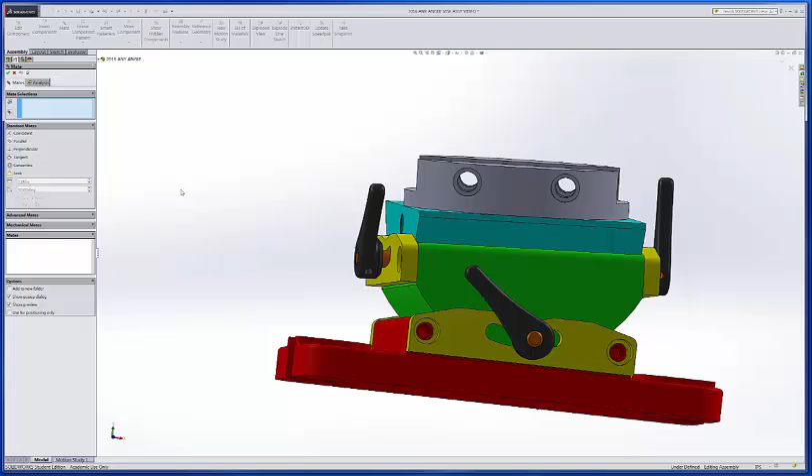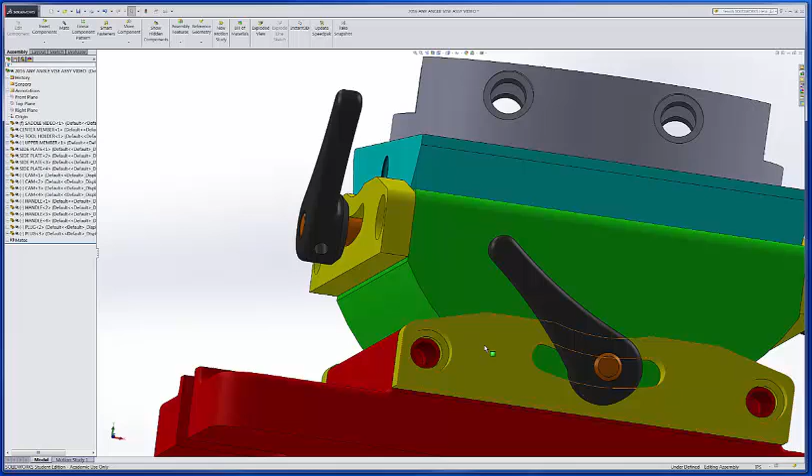So the first thing I would suggest is that we'll use a mate to line this thing up where it's flush, if you will, or 90 degrees. We want to take these two, and we're going to just temporarily get those where they line up, so that if we look at this face and we're looking straight in there, we can see that this edge right here along this green is lined up with this piece right here.

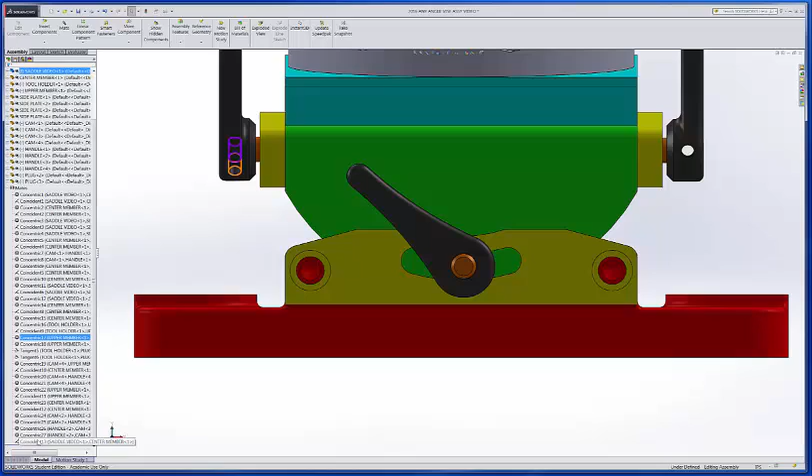So we don't want to keep that, so we'll go to the mates here, and we'll go to the last one, which is this coincident right here, and you can see that highlight, and we'll delete that. So we'll say yes. If we don't delete that, we can't get the movement that we want.

So now what we'll do is we'll put in another mate. Now up till now, all the mates we've been dealing with are standard mates, but now what we're going to do is we're going to use an advanced mate here, and we'll do a limit. So we're going to limit the angular movement.

So we're going to pick this face, and we'll pick this face. Let me back up on that. I think we're going to have to. Yeah, I think I picked the wrong one. Maybe. Let's see. There's 0. No, I guess we'll be okay.

So we want to go as much as 16 degrees. Okay, on 1. That's the maximum, and the minimum, it's going to be minus 16 degrees. Okay, and we'll accept that, and we'll see what we get.

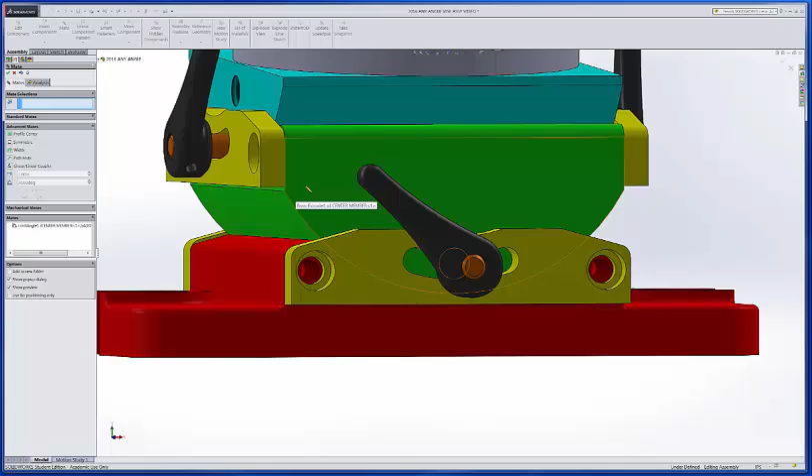So if we move that now, notice it limits how much we move. The only problem is I want to make sure that if we go in there and look at this face again, oops, sorry, I need to get out of that command. Go and look at that face. Normal to that. Yep, we're not hitting.

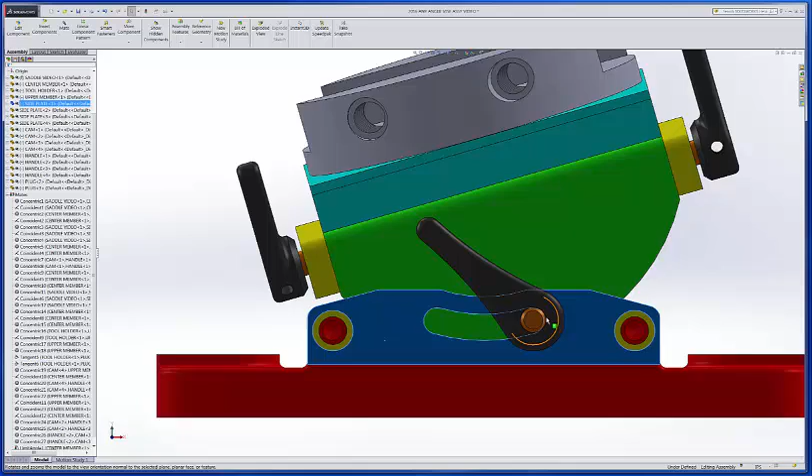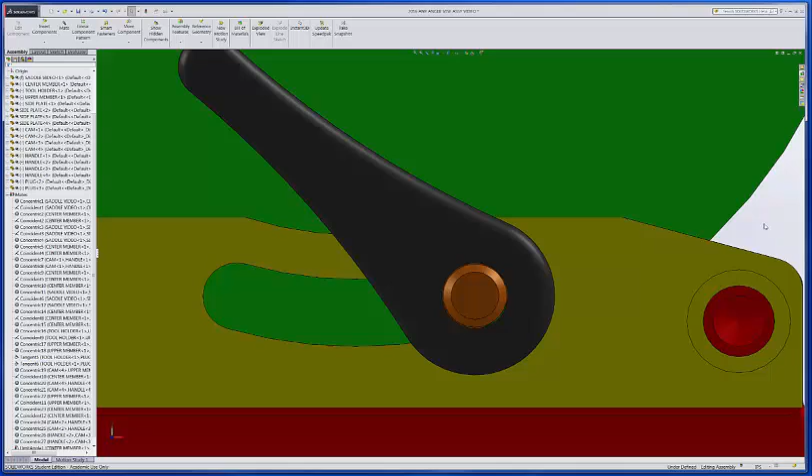Although we can see, are we hitting over here? Nope. Actually, we did go beyond that, didn't we? So 16 degrees does go beyond this piece right here. You can see that this arc right here, that pin should not go past that arc right there. So our 16 degrees went too much. But it didn't interfere over here, so we're okay.

So what we might do then is go to this limiting angle, and we'll edit that. Well, got into the wrong spot there. So we'll edit that, and instead of 16, let's go minus 15. Or excuse me, 15. And we'll go minus 15 on the other one, on the minimum.

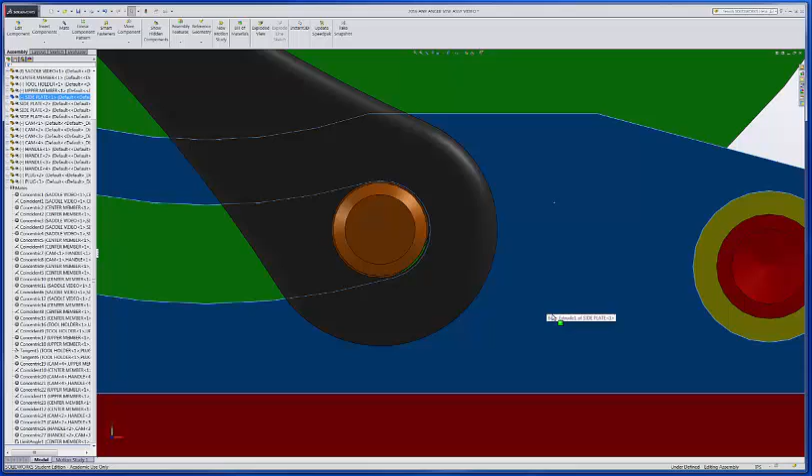And we'll accept that out of there, and let's see what that does for us. So in fact, you can see that now there's actually a little bit of room there. Now what we could have done, if we wanted to see just exactly what that needed to be, we could have made this plug concentric with this groove angle there, instead of doing the flush.

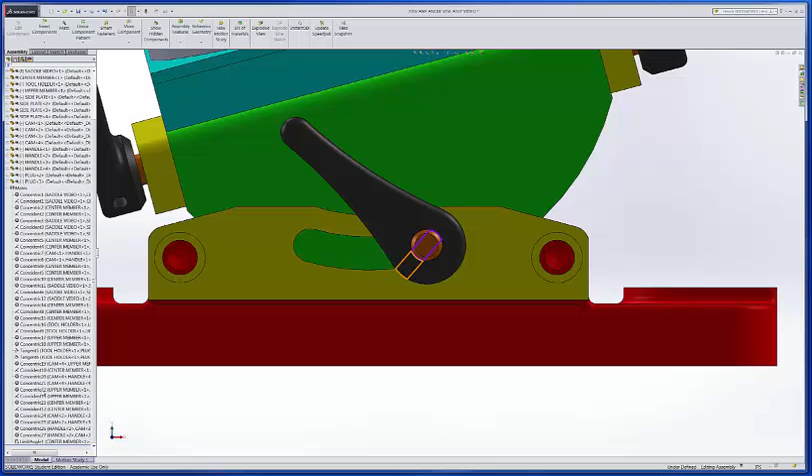So let's redo that one. What the heck? We've got time, don't we? So we'll delete that limit dimension, and that's, so we're running wild here, right? So now let's go in there. Let's tell me I need to save. So we'll save. That's that reminder.

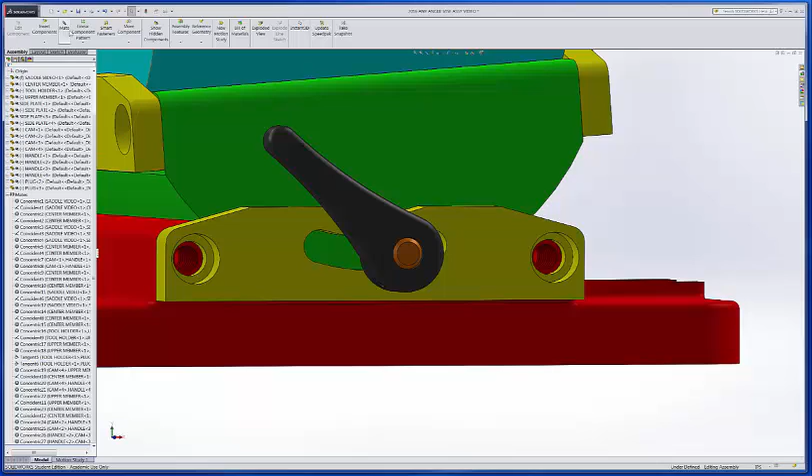Okay, so what we'll do is we'll go in here now, and we'll go and mate this cylindrical face, actually it could be any of them, couldn't it? Because they're all concentric. And that one, now we want them concentric though, not tangent. Although we just did tangent, sorry.

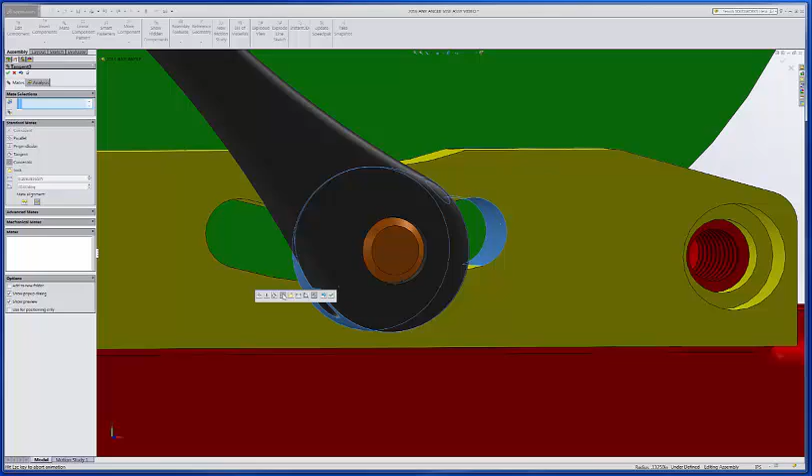Concentric, and I don't know, something doesn't look right there, but maybe our 16 degrees was okay. Oh, it is okay, but remember that cam wasn't in the right location. So our 16 degrees actually was okay. So let's go back in there then and set that back up.

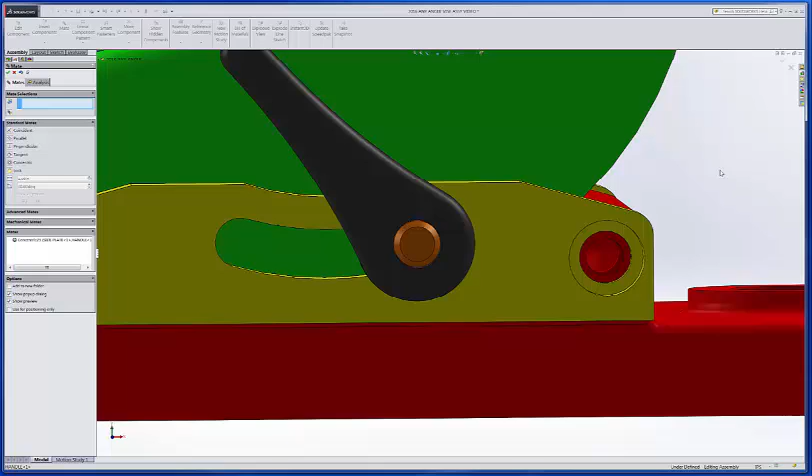And to do that, that's easy enough. We'll just go back and pick this face and this face, and we don't need the standard limits, we need advanced, and we'll go to the angle, and we want 16 and minus 16. Accept that, and now we should be limited here again.

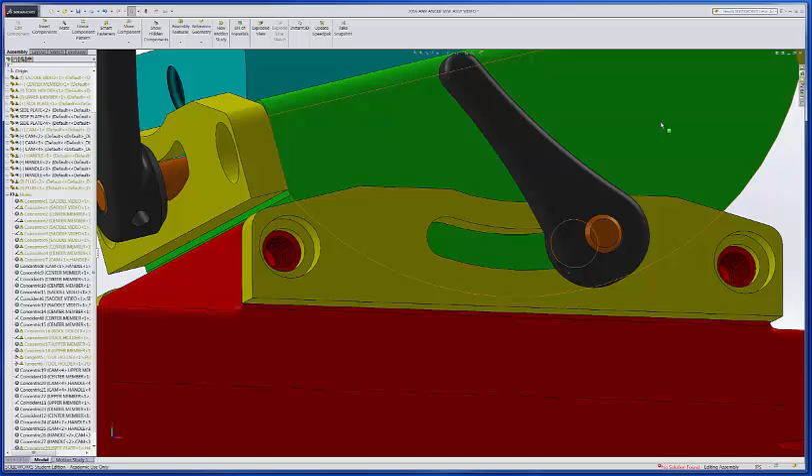Let's see, let me close out here. Well, what did I do? Let's see what I got here. Oh, I got that. I still have the concentric, so I'll delete that one. Forgot to delete it. Okay, so now we'll go. There's our 16 and 16. So let's look at that.

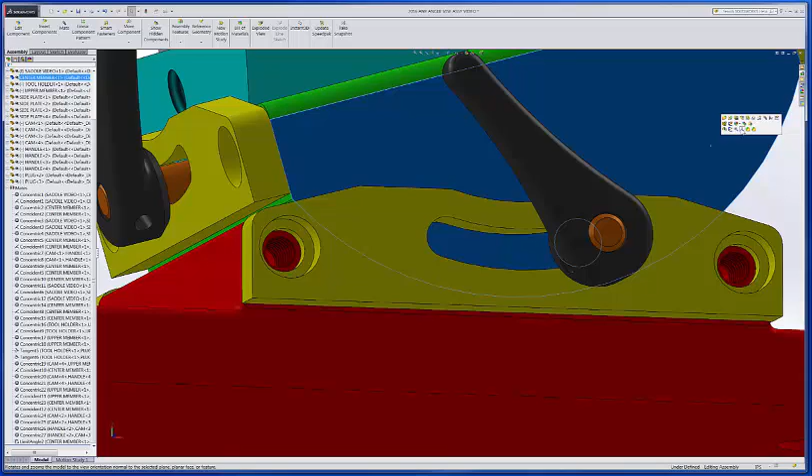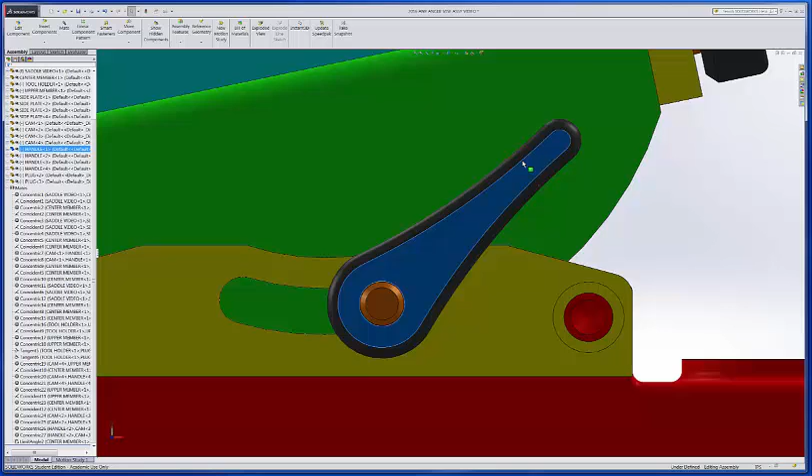So again, what was going on there was this handle was pivoted wrong, so that made that not concentric. So that's what locks this thing in, is when you get that handle to where they don't match up like that. So if you turn that handle enough, it's now putting pressure on that green center member to lock it in place. So that's why that didn't look correct. It was correct.

So we've got that one limited. So now we can go in there and limit this other one. So let me just fix this one. So it doesn't move. This one still moves. So we can set that up, and we do the same thing.

We do a mate. Again, we don't need standard, we need the advanced. And we'll go in here and grab this face and this face, and we'll do a limit on the angle. And it's setting at 2 right now. We would need it to go 16 and minus 16 on the minimum. Okay, and accept that. Close out of that, and we'll make sure that we've got that thing is limited.

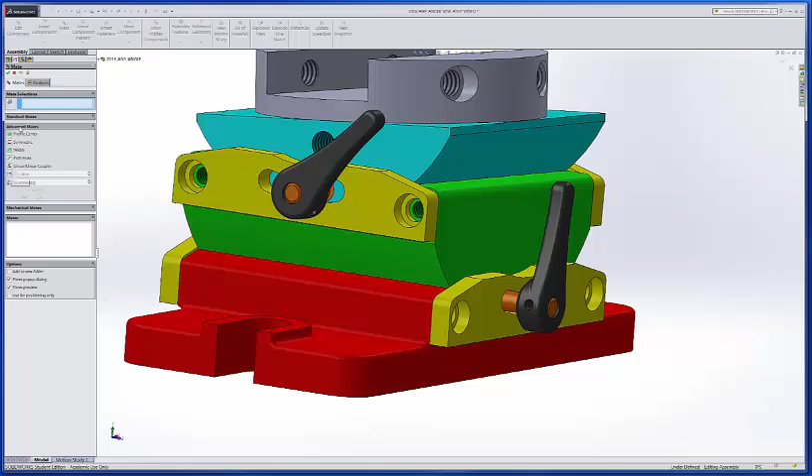Okay, so we're good there. So that's limiting in that direction. Now we have other limits, but we'll have to deal with those in another assembly. So it would actually be to limit the linear motion. So that might be of some value too, or we could limit distances. So, but that's all I want to talk about on this one.